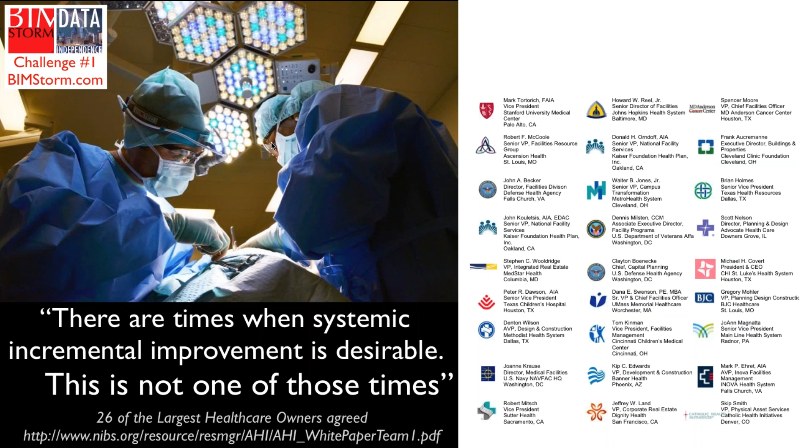I strongly believe in them, but I also believe a lot of what we've been doing has been focusing on the complexity and importance of the complex standards. But how do we make it simple enough that we can get people excited about using the standards first, and then also move the industry forward faster and show results to the owners relying on these standards as one example.

And this is what we want to do at BIMStorm. We want to say, how can we look at things differently? So it's not just about how we go about working on building information modeling today on a typical project. All that is still very important and central to what we're doing here at BIMStorm.

But we also want to think in terms of what we're all used to today - opening up our mobile devices and getting access to information on the fly. We can find the nearest restaurant, reserve a table, look at the metro schedule, see how busy the freeways and traffic is, and make decisions on the fly with very complex data around us.

But what we don't have access to right now, which is unfortunate - and it's also a low-hanging fruit and an opportunity - is that our buildings and facilities do not have data we can access in the same way, for many different reasons. There are obviously technological reasons, but there's also cultural and business reasons why this is not happening.

So we're challenging the industry to change that, and that's what BIMStorm really has been about - moving the industry forward as fast as possible, looking at that in terms of data and information. How do we get data and information and make it accessible to many users?

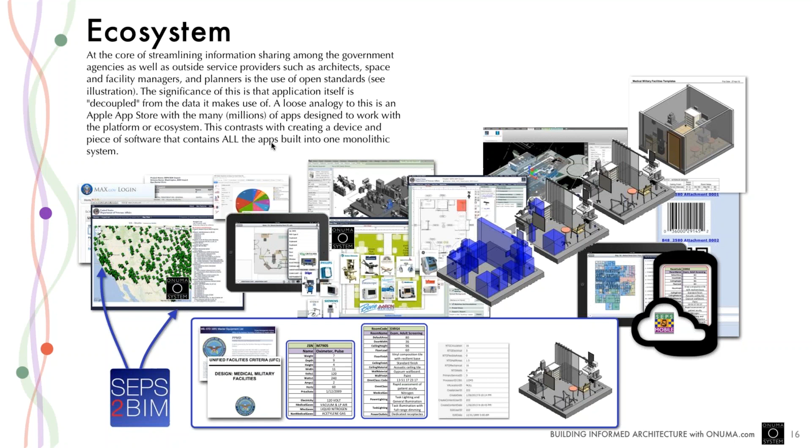So this is not something where you have to come in and think you don't have anything to offer or participate in. The fact that you are here listening to this, if you think you want to fit into this ecosystem and grab the opportunity of this rapidly changing world and industry, this is a chance to do it. And we're going to do it in a pretty rapid fashion.

This is the SEPS2BIM website that I mentioned, from the VA and DHA, which has their program requirement data that we are going to use. Here's a typical requirement for a dental clinic, and the type of space and equipment that we need in that clinic.

That data is accessible on the web, and there are multiple tools already directly linking into this, using the data from this into tools like SketchUp from Trimble, taking the data and automatically generating BIMs from servers on the web.

There's a lot of documentation through the NIBS projects and white papers where analysis has been done. A lot of this is very important, and we've been directly involved with it ourselves, analyzing what the life cycle looks like and what the workflows are. All that is important, but it doesn't really mean anything until you actually get in there and start doing something with it.

In the BIMStorm, we're actually going to set up specific scenarios where we've heard owners say things like, we wish we could take design and construction data, move it into facility management, and manage our assets, equipment, and spaces more efficiently. That's a very specific use case we hear over and over from owners who wish they could do this with BIM data in facility management.

And the BIMStorm is a perfect place to actually learn what's possible from an owner's perspective, learn what you can do as a vendor and consultant, and also learn from application developers, people who build the apps around us, which is going to be a larger and larger community because it's easier to do that now.

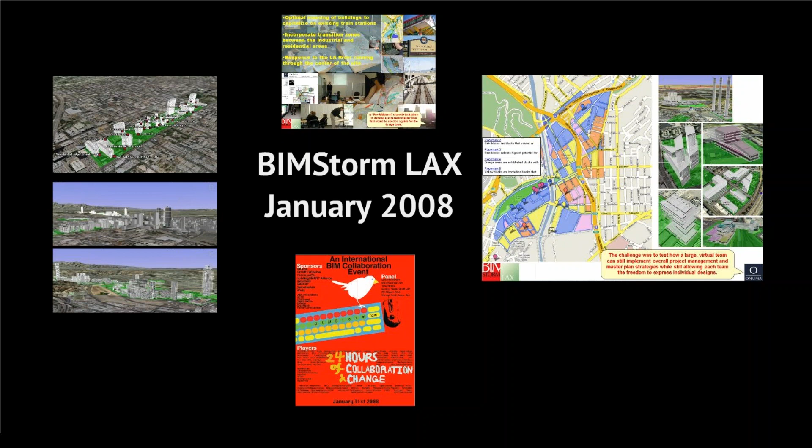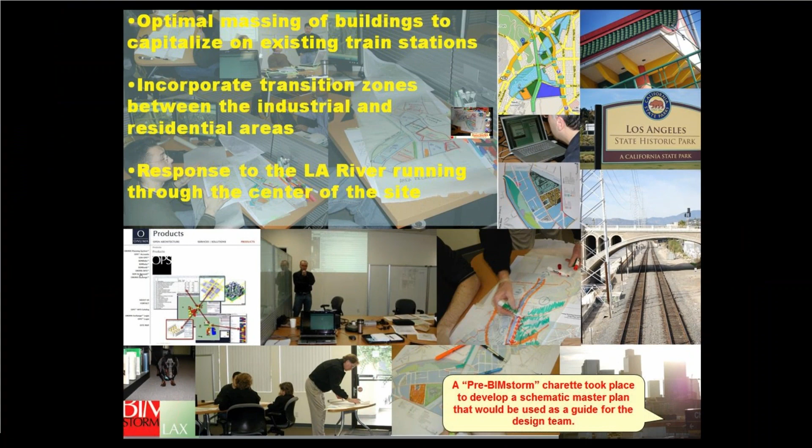Because as you're going through this, you're going to start having some aha moments that could benefit you in whichever hat you wear, whether you're an owner or another stakeholder in the design process. So you can look at this online. I'm just going to flip through this quickly here. I don't know how fast it's going to be refreshing on screen, but we're not against using manual methods. Analog is still good. Paper and pencil is still good.

But the faster we can get these decisions into a format that can be shared with others, so we don't have to wait and look for that piece of paper. We want to see the acreage of that site, which was a decision made here. What's the zoning of this area of the city? We were actually setting up planning and zoning scenarios where the planning department would set up the requirements and the designers could react to that. So we want that kind of dialogue between different groups. And we want to remove the friction.

You don't have to use any of these technologies. You can even come in with paper documentation. It's open for everybody. So you can watch this online. I'll flip to the next slide here and continue with the presentation.

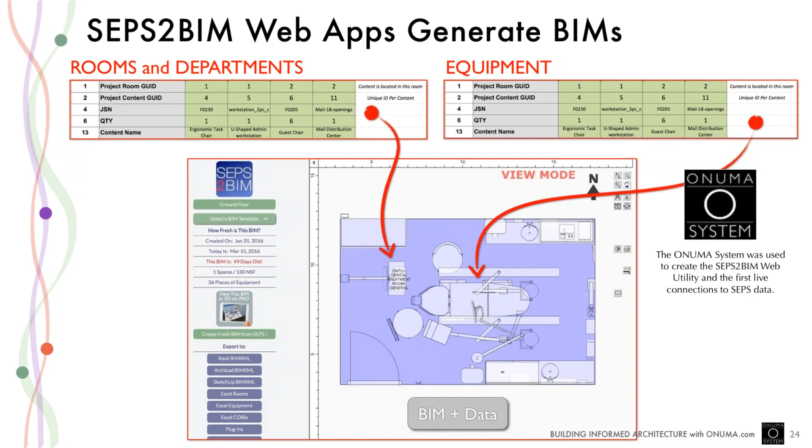And there's free utilities online, and our system, the Onuma System, is one of the things that plugs in, but it's really insignificant. Other applications have already plugged into this, and we want more vendors and more software applications to plug into the system that the VA and DoD have opened up. So that's what SEPS2BIM is all about. And we'll be talking about that quite a bit and giving you access to the actual data to work with.

On the right side, if you don't want to deal with the data at all and you only want to work on the design, on the lower right side you see a requirement model of spaces with room data sheets essentially. Here are all the spaces that you need in this dental clinic. Go design with these pieces. So you don't have to deal with the data if you don't want to. If you want to focus just on the design, that's fine too. The key thing is that we're all talking about the same thing, because if we're working in this ecosystem, we're all working with the same data, and we can work with whatever application we want.

And these are some of the vendors' applications that have already started to plug into the SEPS2BIM ecosystem. So there's ArchiCAD from Graphisoft, there's Attainia with medical equipment data, there's Onuma System online web, there's 3D Warehouse and SketchUp and Trimble, there's Autodesk Revit, and there's BIMobject.

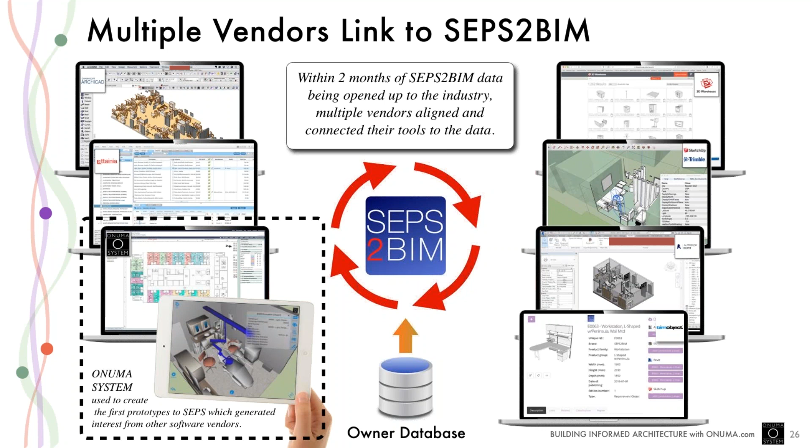So all of these tools now are in alignment with this data that used to be distributed by CD, but now because it's on their web, they can link to the source data and not have to worry about converting the CD data into some tabular format into some database and importing it into their application and trying to keep things in sync. So having real-time access to the background data absolutely changes everything, and is part of what we're focusing on in BIMStorm. How can we keep this live data going?

So one example is the U.S. Army Corps of Engineers looked at the SEPS2BIM process. This was part of the buildingSMART Alliance prototype that we did, and we said, okay, what if a new engineering group like the Army Corps of Engineers came in and looked at this data requirement? Could they go through a design process very rapidly and work it into their workflow of using their tools?

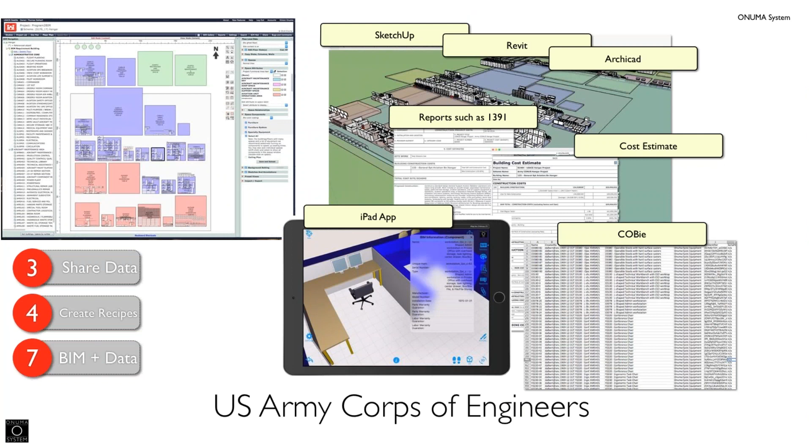This was a 2-day charrette in the Seattle district of the Army Corps of Engineers, where we brought 4 people together that were physically there and that flew to Seattle or were already in Seattle. We had a group in Los Angeles, another group in Hawaii, and others around the world that were logging in, and we collaborated using Trello and using the online data and using the different BIM applications, Revit and SketchUp and ArchiCAD, and the testing of that data in a few days to validate and look for places where there might be problems and adjusting things that might not work, the plumbing between these different tools, what worked, what didn't work. And these are some of the results of that, using the various applications to run through the workflows.

So now back to this BIMStorm. For data independence, we've set up projects with actual data. Some of you might recognize this floor plan. I believe this is the COBie clinic that the buildingSMART Alliance has been using for the COBie validation, that has a Revit model and the mechanical model, data and attributes inside that has been pulled into a model server on the web and is created as a scenario in the BIMStorm, and we're going to set up a requirement model like this, or you can use this model to connect your tools to show how it would be used for life cycle, for example.

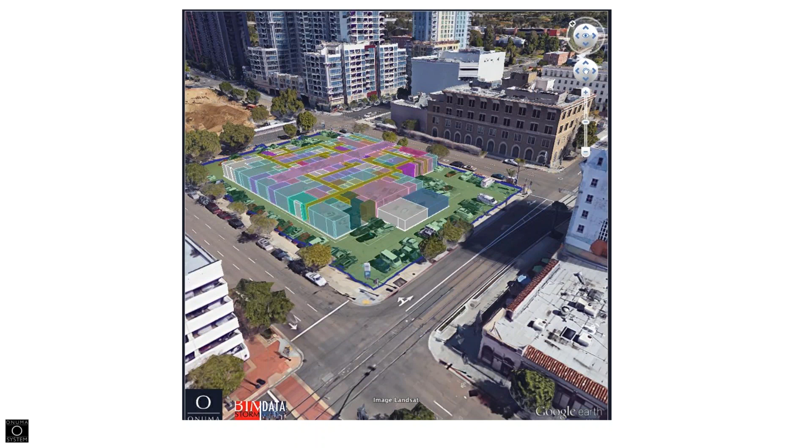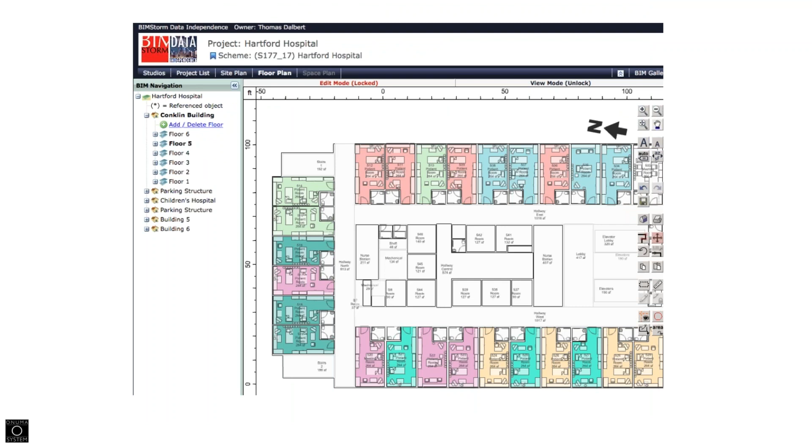Same model, COBie clinic in a 2D view, and in our world too, a lot of us think of BIM as being 3D only, but even 2D data with 2D graphics with data associated with it is just as powerful, and in some cases more powerful than the 3D alone, because you don't necessarily always have to look at 3D, and if you want to pop it into 3D, you open it up in a 3D application. So it's the applications that use the same background data; you can open it up in different formats.

Okay, so a few days ago we made this announcement, and this is the first time we're talking about this publicly on the web, and this is extremely exciting for us at the Building Smart Alliance, and the fact that we're actually announcing it in this BIMStorm. This is a project initiated by the Building Smart Alliance Thought Leadership Subcommittee, of which I'm the chair, and we have a group of 20 people there.

We were challenged by saying, what if we look at some of these tools that are out there and think in terms of how do we build an open source version of BIM that's easy to implement, easy to use, and what if we even use this as an opportunity to build and create standards much more efficiently rather than a long drawn-out process. So this is still a prototype, so we didn't necessarily have to ask permission of how we should or shouldn't do this or how standards are built. We kind of stepped outside of the current way things are done and said, what if we just start from scratch and see if we can do this within a few weeks.

And this is part of the new way that software is developed now. There's something called Agile software development, where things are built really quickly, and you build a first version, and you put it out there to the world, and you have people react to it, and you start building new functionality on top of that. That's how a lot of these web apps are built. It's no longer this long, drawn-out, let's plan for 1 year of what we need to build, and then let's start building the software, and oh, we forgot something, and then the software failed. And a great example of that failure is healthcare.gov. It was drawn out, it was built, it was put out there, and it crashed after millions and millions of dollars. So what you want to do is do fast iterations, build really short, quick wins, and test them.

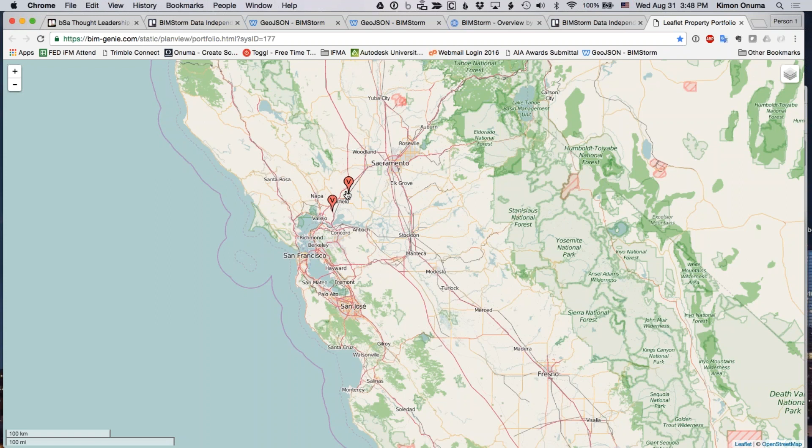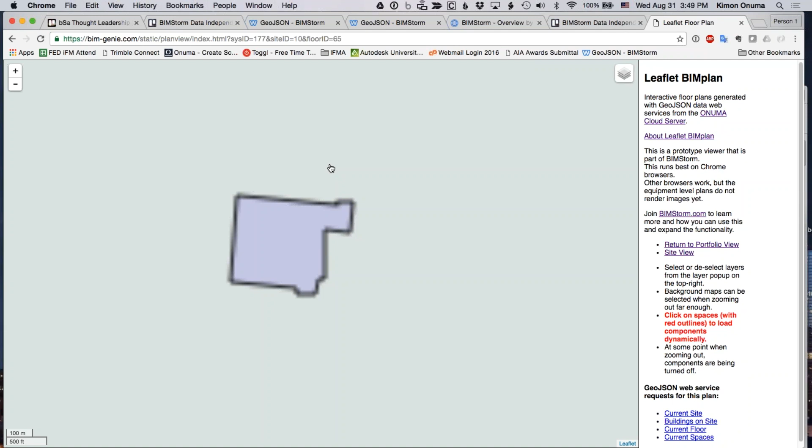This is their campus here. If I click on one building, you see this is actually some of their facility surveys that they did with the actual photographs. You can see the first floor plan. They worked with a group of architects and engineers called Steinberg from San Jose that documented their buildings. You can actually see the individual spaces and actual data associated with it. And as you zoom back out, this data kind of disappears and goes back to the map view. So you can turn different layers on and say, well, I want to see the OpenStreetMap or Esri map of that location.

One more I'd like to show, since we talked a lot about the clinic, is the VA DoD clinic that we set up in our previous presentation. Some of you may have seen, we've actually set that up as a project now that's going to be accessible to the participants, and we parked it for now in the middle of New York

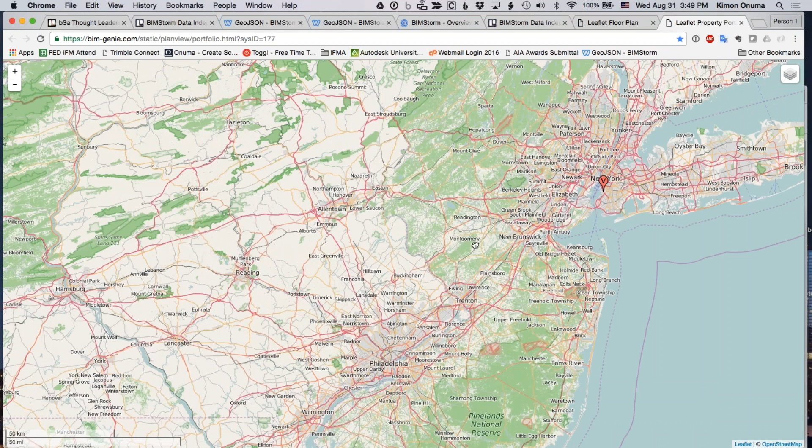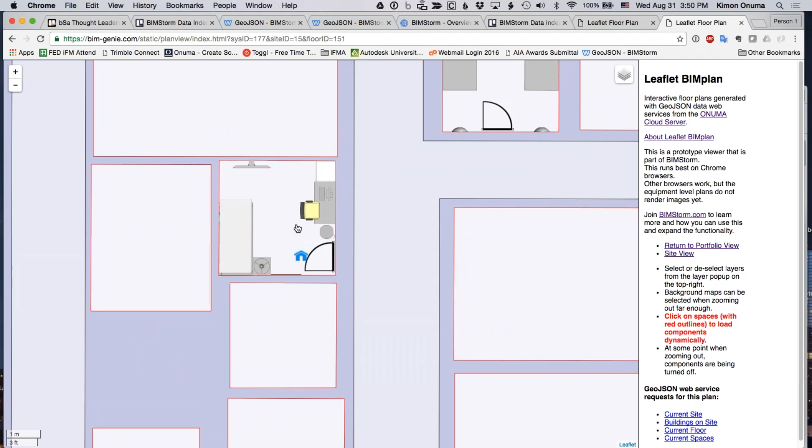It's right here in this site, and if I zoom into this, you actually see the clinic building here, and I want to go to the first floor, and I just want to prove the point that if I zoom all the way into here and want to load components, each space actually has equipment loaded in that originated in the SEPS, the Department of Veterans Affairs database that they have online of equipment requirements for a typical office like this. In this case, it's a duty on-call room, as they classify it.

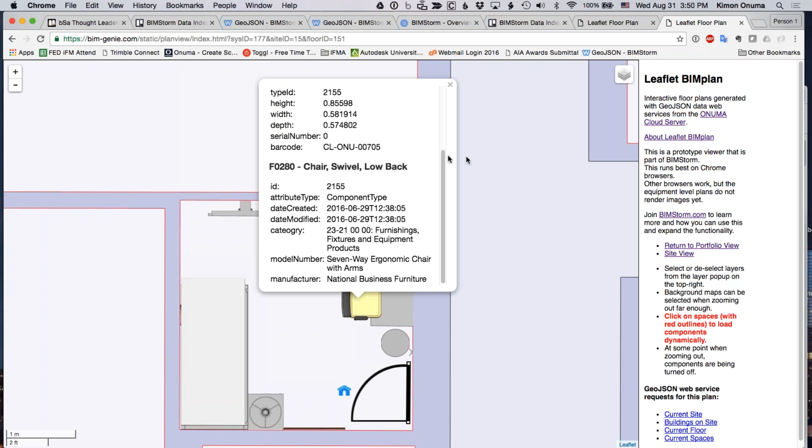And each of these pieces of equipment has attributes. So this again is about what I stressed earlier. None of this was typed or exported or imported or IFC exported and IFC imported. It's a direct link to the owner database that streams into these models. So I, as a designer, don't have to worry about anything else but focusing on this is a requirement and I need to design with it. And that takes all the complexity away of dealing with the data import and export. And from here, you can go and use it on different tools like Revit and SketchUp and Onuma, ArchiCAD, the ones that have links to it.

For the software developers out there, on the right side, this is getting a little techy, but I just want to prove the point that all the source code for how this was built is here on the right side. So if I say I want to see a list of current spaces, it's not going to look like a graphic anymore, but boom, it's going to hit the same server and give me the code. This is the JSON code, which says, for example, here's a polygon of, I think this is a building. Here's a polygon of a room, the XYZ coordinates. There's attributes about the room.

So this is a machine code that can be used to generate shapes and generate buildings and generate CAD. And it's all exposed here for developers to actually see and work with that. And we're going to be running through scenarios of what you can do with it. So this is just one interface of what you can do with this data, but I'm sure a lot of different ways are going to emerge as we continue on with this Leaflet BIM GeoJSON project.

I want to remind you that there are upcoming events and actual physical conferences happening in October, quite a few of them. We'll have them all posted on the BIMStorm site. We already do, in fact. So if you're in Wisconsin, for example, we're going to be setting up scenarios in the next month or so that are going to be specific to Wisconsin and the AIA and architects there and the Wisconsin Department of Health Services and the healthcare owners that are gathering there for this annual conference. And we will be presenting at this conference the results of the teams that are doing their work and how this process worked, and actually interacting with the audience members there to show how this is actually possible to start actually working with the data live.